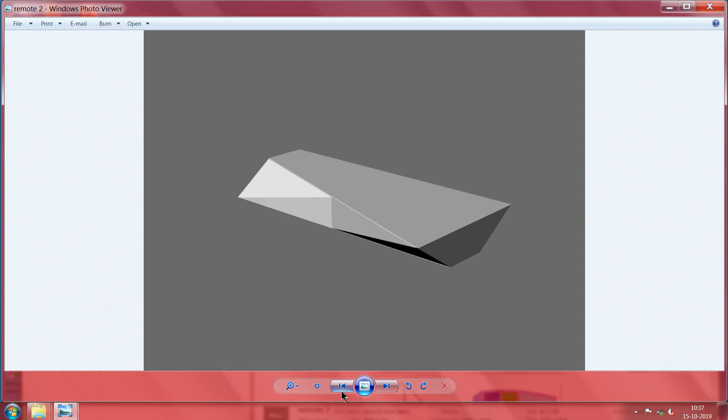You remember, this was one of the remote controls, and then I had taken you through a walkthrough, saying how to make a cardboard device simply at home and don't need to go to a professional printer. And contrary to popular belief, home printers do a really good job.

Now, I will start this time with a slightly different device. You see here, that is a seminar timer meant for students. The idea being, can we make something such that anybody can make it? And why a seminar timer? Because typically this is what students will be very familiar with.

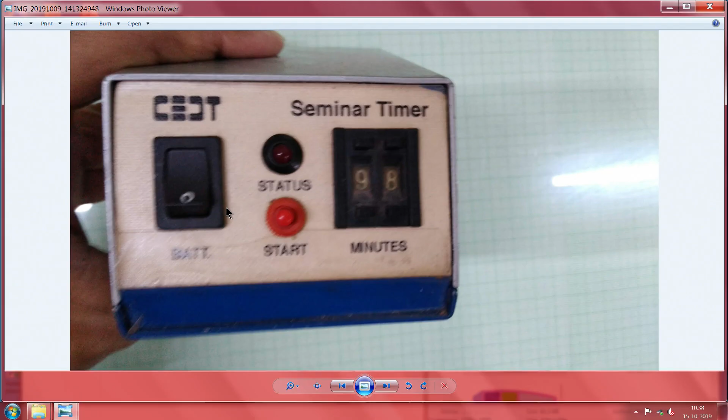Now, if you look at my display, one of the first things is at the background we have a graph sheet. I thought I will show you the seminar timer and all the things. So at the back you see a big large group of people who are working here. That is me.

This is the industrial designer we have. This is the graphics and user interface designer. Then he is the electronics engineer. Then he is the PCB maker. Then we have the assembly person, and then we have two people who are from the sheet metal shop.

This is where I get into saying we probably need to make a simple cardboard rendering, so that before we end up having to get it fabricated, we need to pitch our idea to somebody.

When we pitch our idea, if you are just to make a PowerPoint presentation, it does not sell that well. Nobody has the patience to see too many PowerPoints. However, if you have a simpler 3D physical model, people will invariably appreciate your effort and...

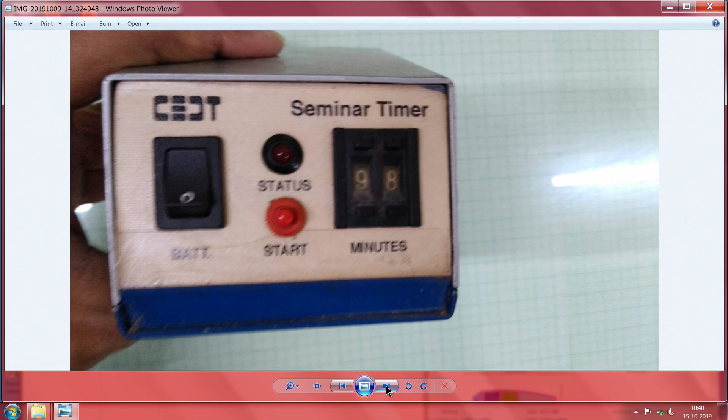Now, the thing is how to lay out the front panel. Laying out the front panel is not that easy a job as we think it is. There is still a lot of time involved in it. One of the first issues is, where do you put this mark and what does it mean and what does this mean?

Okay. And what is this 0? What is that 0 doing here? Does it mean it is off or does it mean it is on? That is where we need to make something to make sure things work.

Now comes to the side profile of it, saying, you see this inclination. Here in this case it seems to be approximately a little less than 30 degrees. So for a person sitting on the table and looking at it, it makes sense.

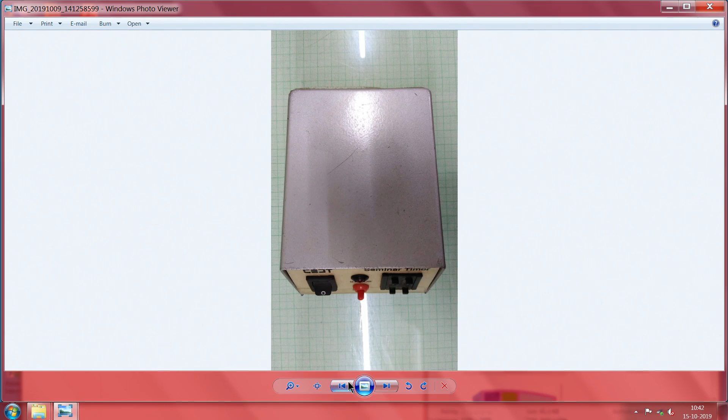And other details you would like to notice, you've probably seen here, there is an oblong hole here, but there is a locating hole here. So this is traditional in any of the mechanical assemblies, because we want to ensure that from the pure fit point of view, any base will fit any other cover. Seen that, no? Now from the top, it is a little easy and not so easy also.

How should it look? Typically on the table, this is probably how it's going to look. It doesn't look very elegant, have you noticed this first of all? Because in the beginning, if we had made a prototype before launching it, we had made a small cardboard enclosure, and things would have been easier.

Now have a look at this, which was made earlier. If you look a little closer, you will notice - let me shift hands - you have the device which sets the period up and down. Then there is just one button which just says start and stop.

Most important is, you've seen this red colored thing - that is typically a tally light. You would have seen these tally lights on cameras everywhere saying recording has started. Right now, of course, several of our new economy things are edited, but when you're into news gathering, into regular video, what is called a camera chain will be there. Usually a 3 camera chain is normal, and the tally light tells you the device is on.

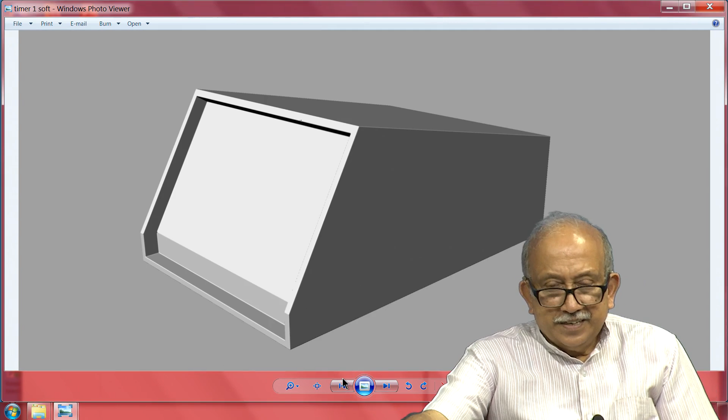Now you see this, typically this is development for the sheet metal. After having made the whole device, we would have noticed that it's not very clean. You see, we wanted a recess here, and at the back there's a small error.

So how do we - you see here at the back now, if you see, while this is a right angle, there's a little problem here. Whatever we wanted to do, all that precision and things have been lost because of this small problem there.

Imagine if we had made the model as I suggested before and presented to the team, things should have been different.

Now comes the thing - this is a rendered 3D solid, and the magic is these days there are any number of programs available on the internet, partly free to try or with limited functionality. One of them - save is disabled afterwards, or a lot of watermarks are generated saying this is done on a trial package of something. So using one of those, these things have been made here, and this has not been saved. After it's rendered, the screen capture has been taken and saved, so that I can demonstrate it here.

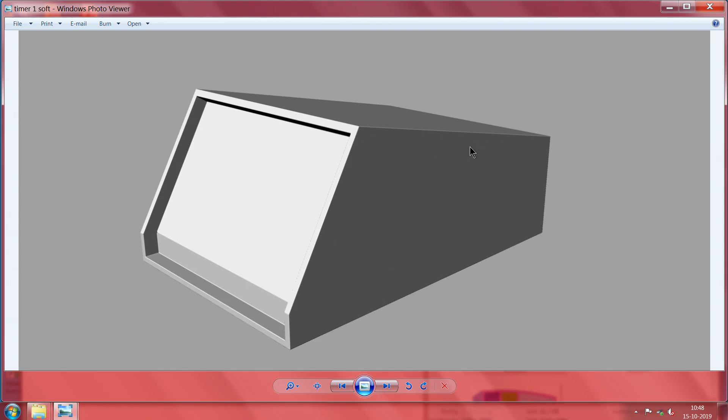Observe this - this could be the front panel we are looking for, just a concept has been made. Keep looking at it and you'll be able to see what this means, and what all these colored things are - have they been made just for being made, or do they have a function? So what does it all do there?

Another equally important thing here - this is probably if we had made this earlier. Now, using our new Arduino and all this, it's very easy and convenient for us to make a simple cardboard model, and having made the cardboard model, we can now take a call on what should be presented there, and do we need the tally light at all.

I will walk you through another model which I thought would make sense. This has been done just 2 days ago, while that timer I showed you was very old. Imagine this is just a box - but in this case it's a 3D rendered prismatic object. In this 3D rendered prismatic object, first thing you see is on one side there's a digital timer. In case the speaker is more familiar with this, maybe we can present this to them. On the other side we have a clock.

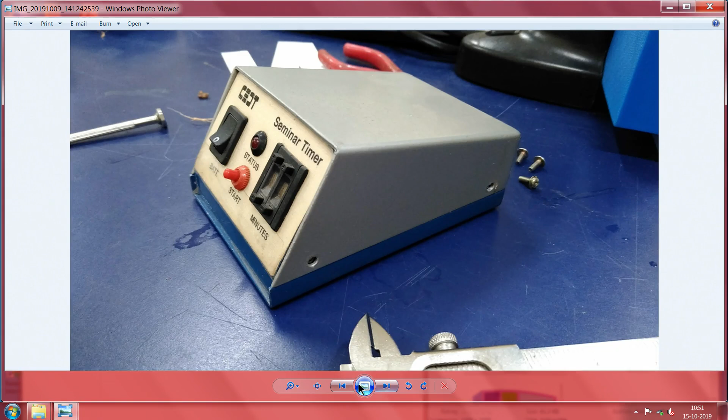It looks smart to me, but I am sure others may not think it is as smart. This faces the chair, the person who is conducting the seminar.

How do we do it? If possible, probably we can attach a real analog clock, or these days if you have a display can do it, but I would prefer to make it, and you see here the same things are visible on both sides.

It is nothing, it is just something that has been made in the workshop, and in fact this is not even 3D, it is just a graphic that is stuck on top of it, but you see how real it looks like.

Now if we were to present it to your group, like that, I told you, even that small unit had 8 people, because we had made around 200 of those units and allowed whoever wanted to take one back.

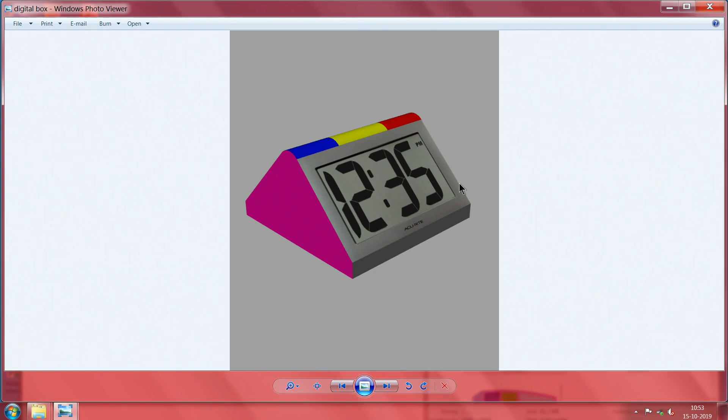Now I come to the importance of, all you need to do is take it and print it. Once you print it, you need not worry, it is there at home. Easiest thing to do is this.

Simple printout. Remember last time I had taken you through all this, all we need to do is just stick it on a piece of paper, and we have the thing what we are looking for. I think I showed you this just to say you just need to proceed like this, and eventually what looks like not a very big deal for us to go about assembling a beautiful model which I have shown.

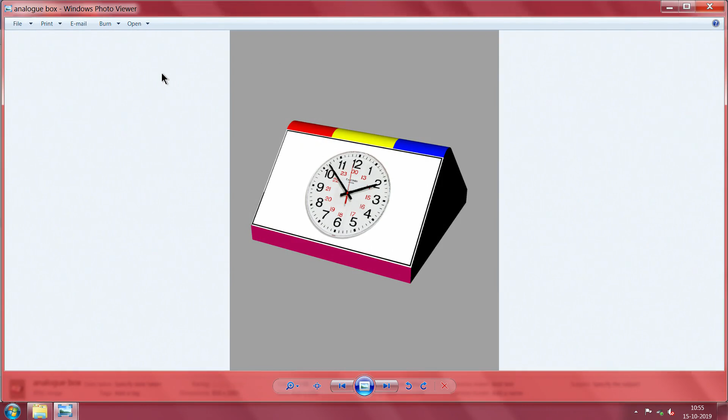Beauty being, now this can be taken wherever you want to go, and you can just demonstrate it. Coming back to that cardboard model which I have made, this is something which can be taken off the internet easily. If you go and look for the device which you are likely to see anytime, all you have to do is just

Search for it, and usually in the application sheet a 1:1 drawing or a picture is given, or in case you already have the device, just take a photograph. Same thing here. I had just gone to the internet, in fact I have taken this from one of the clock catalogs. So I have a beautiful clock face here.

Now, if we print it at one of the developmental drawings which I've shown you, this represents a top, this represents the face that is facing the speaker, this represents the chair. If you just print it now,

there is a photorealistic photo print that has been taken from the computer, and probably at your work spot, no need to talk to anybody or anything.

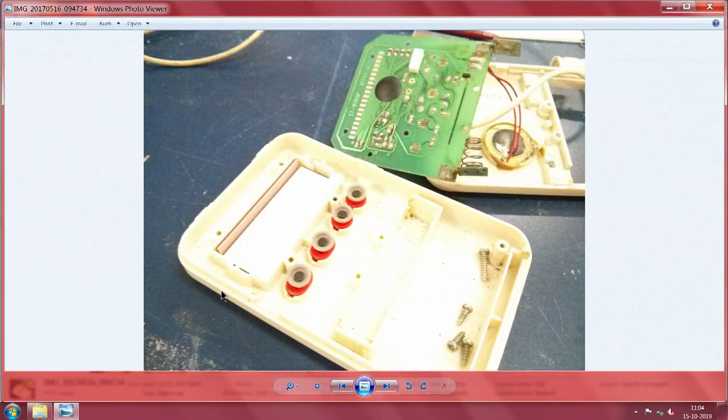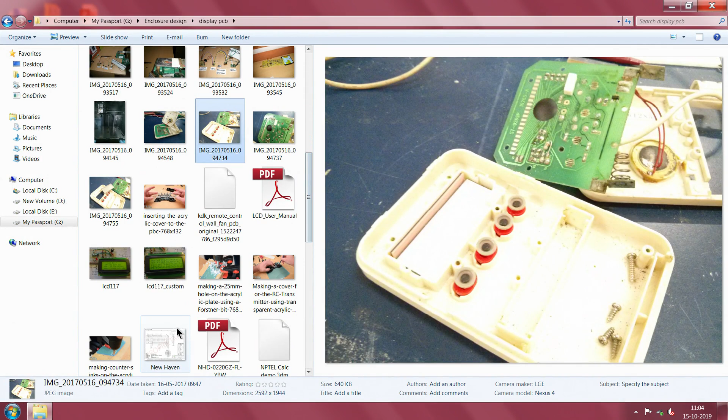My favorite is this - this is the kitchen timer which you are likely to find at home. So if you have an Arduino, and the display and all that, you can always make these things such that eventually it will be extremely easy for you to make these things as you like at home. All the details are available on the internet, and I think I showed you earlier.

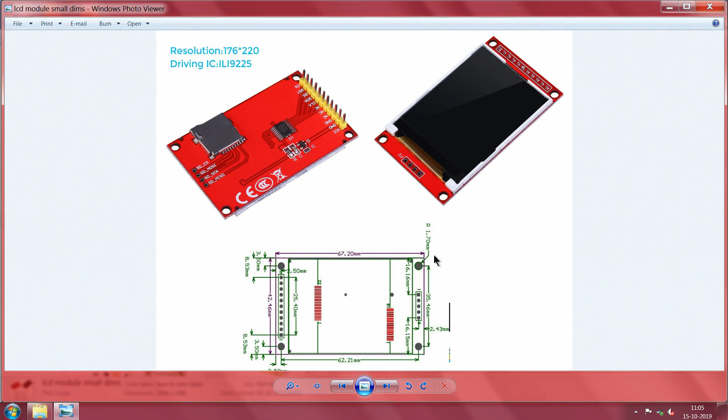As much detail as possible you can pick out from there, and once you complete your model based on the dimensions that are given here, total saying this is around 42 millimeters by 67 millimeters, and then this is the display. So probably the triangular face I have shown you can be part of this display on one side, other side you do not need it, you just need to stick things.

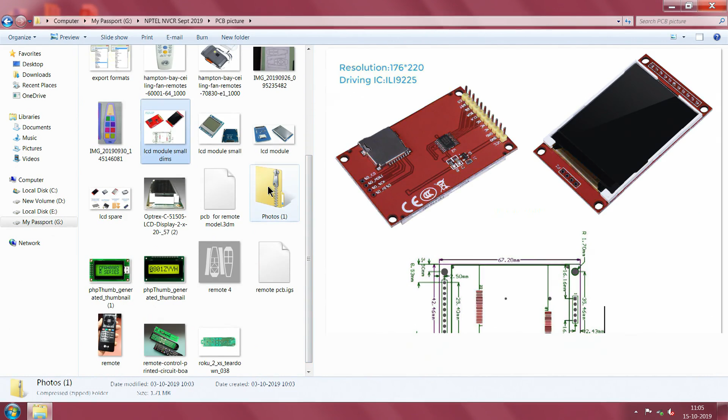And once you decide all this, probably in this case I have just taken that I think it is a Mentos box and try to make something about it, but this is not the right way of making it. For you to understand the first time, probably this is the easiest way for you to make these things. Having done this, it is a matter of ease for you to go about making anything you want very easily.

Remember this? See this corner. This is where I thought I will stress an important thing. This is ideally to be done by assembling using probably polycarbonate or acrylic sheets, and printing an inclined surface like this usually does not come out well in most 3D printers on two counts.

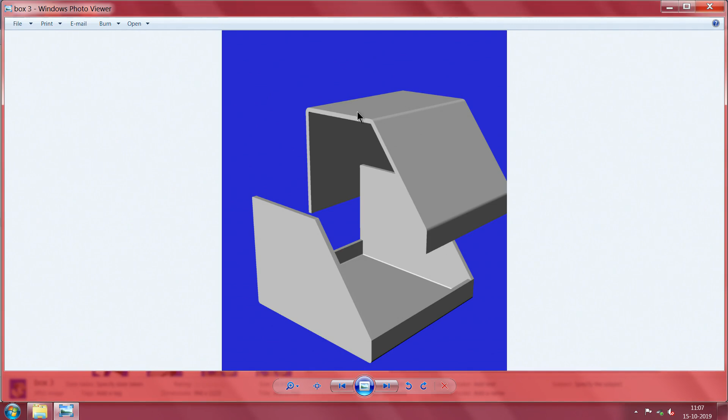First of all, if you see the cross section, whichever way you orient it, we end up with a lot of support material being wasted and granularity on the front surface. So you will end up having to fix one more sticker or fascia plate on top of it.

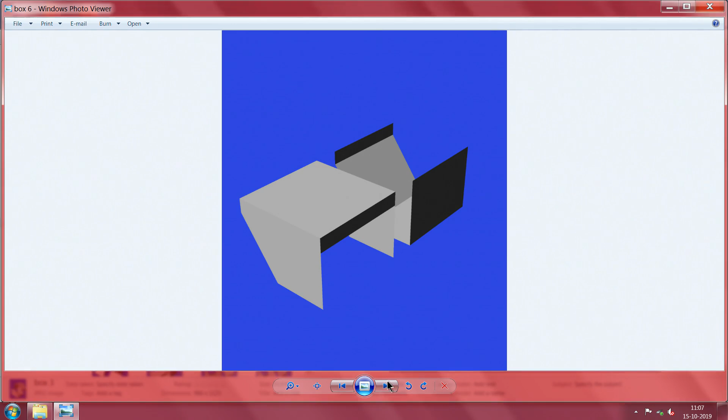So the moment you go to all these things, most of these things can be successfully avoided if you can make a simple rendering on your own. You have seen that, no? This does not have any thickness, zero thickness, but what goes inside where and all that can easily be decided on it. So I will stop here, and this is just a development sheet and all that.

Next time we will go on to our workshop where you can see first of all very fundamental things, saying how do we make these parts, how do you bend them and so on. Second thing is how do you make a layout.

This is where what I feel is a considerable amount of accuracy can be done without having to resort to skill, improvement of your skill. If you are an electronics engineer, you should concentrate on your electronics. If you are a mechanical engineer, you should concentrate on those things, and once you pass it on for the next fabrication, they are the experts in that.

There are tool engineers, there are forming engineers, there are people experts in all the operations. Once you give it to them, they know probably how to make this layout of a sheet, how to carry on the bending, what is a practical thing, and how do you get 100% yield of those things.

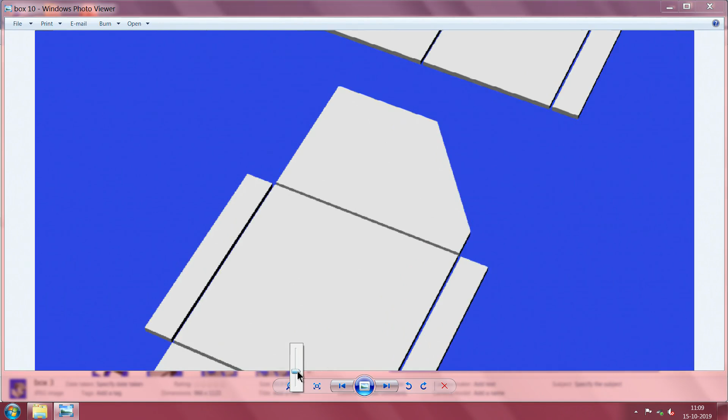...if you are to make a printout of a developed drawing like this, including in between the gaps they represent - there is a small gap there, can you see? This gap represents the internal bending elements. So if you add all these things and make a scale drawing, you can happily transfer this to the sheet metal that you have.

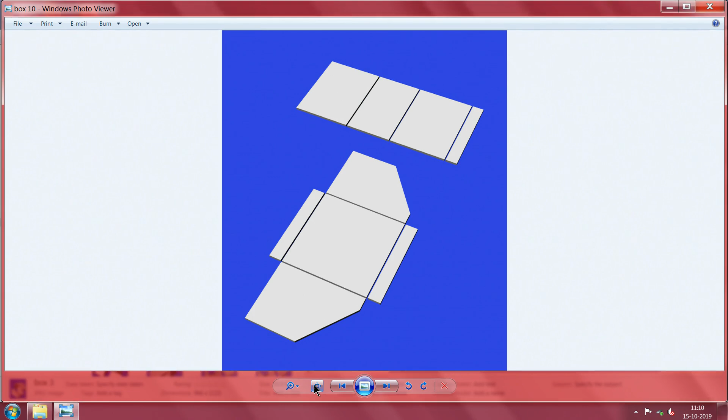And in case you have plastic or any other non-metallic items, you can take these small pieces individually and take the most important part of what goes in. This can, for example, sit outside or this can go inside. And once again, based on that, if you extract these various faces and then present it to the fabricator...

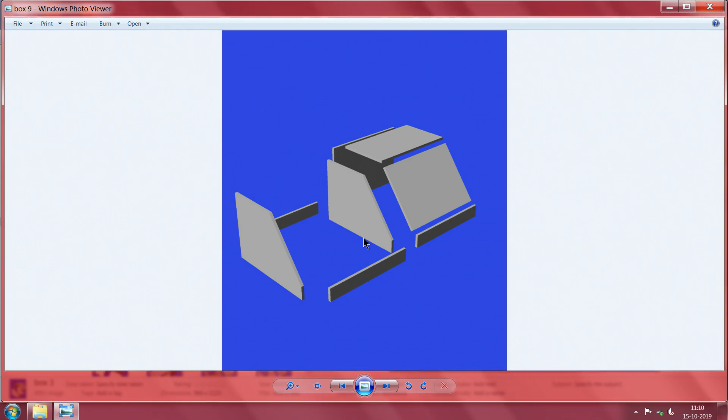...it is easy, very easy for them to first of all estimate the total material that is required. You understand? Most important is how much material that is required, or the scale of operation. Up to maybe 100 or 200 you can manage it, but then if you want to make tens of thousands of it, finally all the cost comes down to what is the incremental cost of the material.

And can you reduce the thickness, then a new operation has come, or how do you now fabricate it in several other places, which is easier. So thank you, next session, if possible, I will try to concentrate on the workshop items.

And while workshop skill has been there, and while making drawing and somebody understanding the drawing, my next jump is going to be saying you take a printout, a scaled printout, somehow transfer it to a sheet and then directly use it without having to do vernier height gauge marking, and then most likely you will have a very useful first cut prototype, very easy to make. So thank you, we will meet again. Thank you.